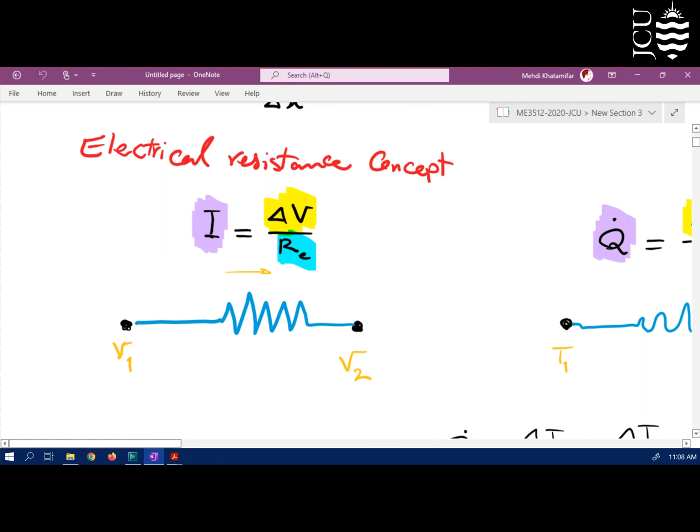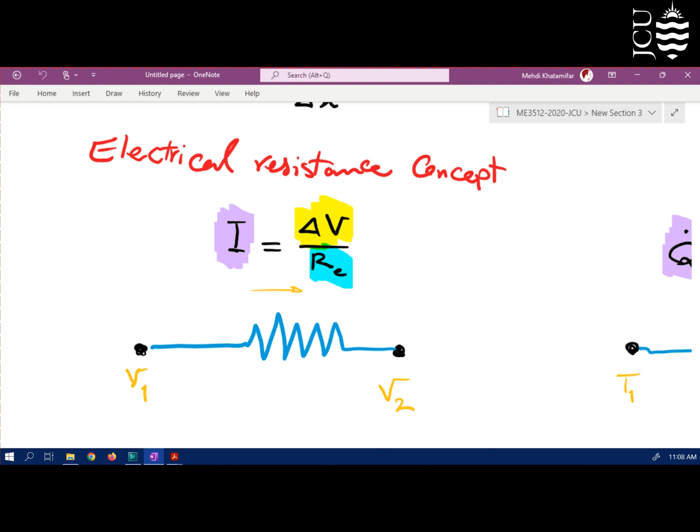Class, this is week 3 summary, and if you remember, we started this session by investigating thermal resistance. What was thermal resistance about? We basically said we are going to use the electrical resistance concept, which says difference in voltage is going to create current.

So we generate a similar arrangement for temperature. The motivating or driving force is temperature difference, and the flow or current we have is heat transfer rate, and whatever is left is going to be our resistance, but it's going to be thermal resistance.

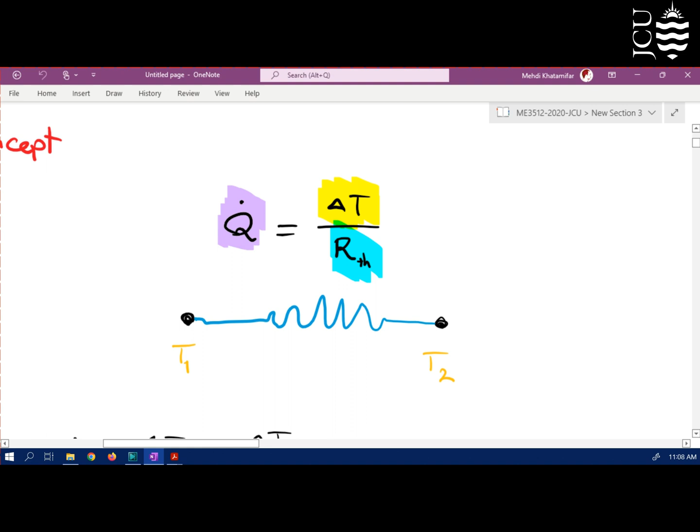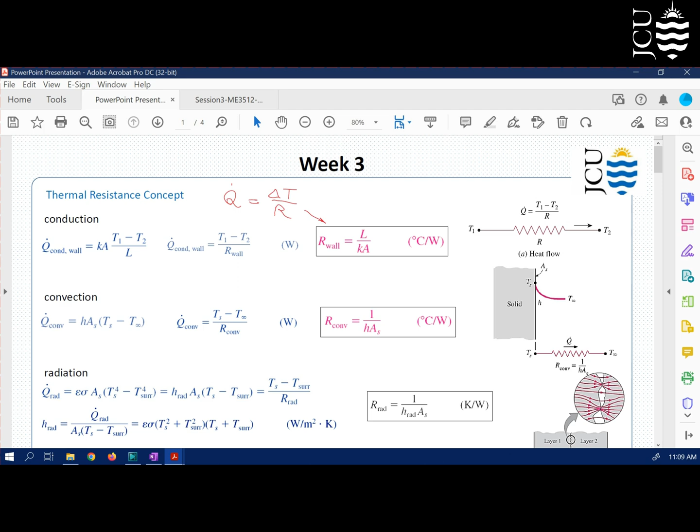So for a flat wall, we introduce thermal resistance when we write Q dot equal delta T divided by R. For the flat wall, it is thickness L divided by kA, and the unit is degree divided by watt. For convective heat transfer, it is 1 over hA, the area being the surface area in contact with the fluid, and you can continue this resistance calculation for radiation.

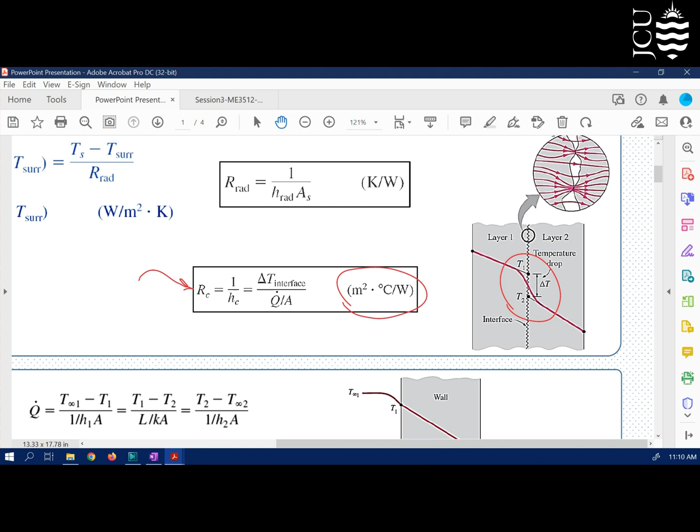Then we introduced another important concept: contact resistance. This is basically the quality of the contact between two surfaces, and if it's not perfect, we are going to have some type of temperature drop there. We calculate a resistance because of the contact between two surfaces, and as you can see, the unit is a bit different — it is multiplied by the surface area, because the surface area is also a very important factor for the contact thermal resistance. This is another resistance for us.

Then we investigated different cases we can have for resistances. For example, here we have convective resistance, conduction resistance, convective resistance, and they are in series. So when you draw their thermal resistance network, you draw them in series, and when they are in series, you just add those resistances to each other.

Remember, it's very important: when you write the formula for heat transfer rate Q dot between TA and TB, the resistance is going to be between TA and TB. This is a very important point.

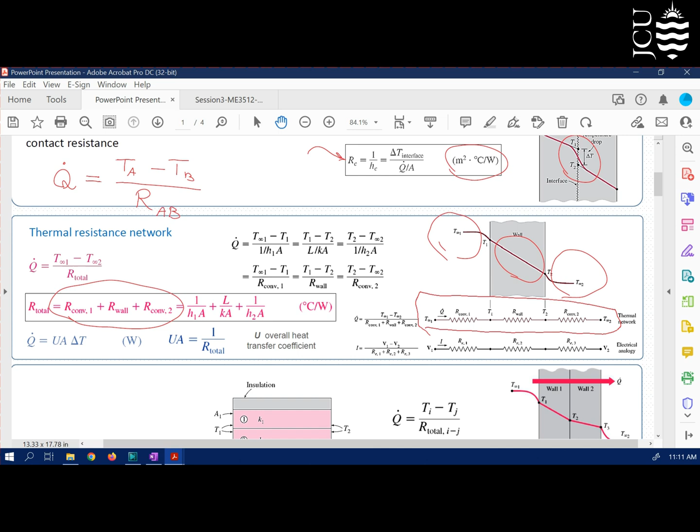How about another case when they are parallel? If they are parallel, you add the resistances as a parallel condition. So the total resistance is going to be 1 over the first one, 1 over the second one, and so on.

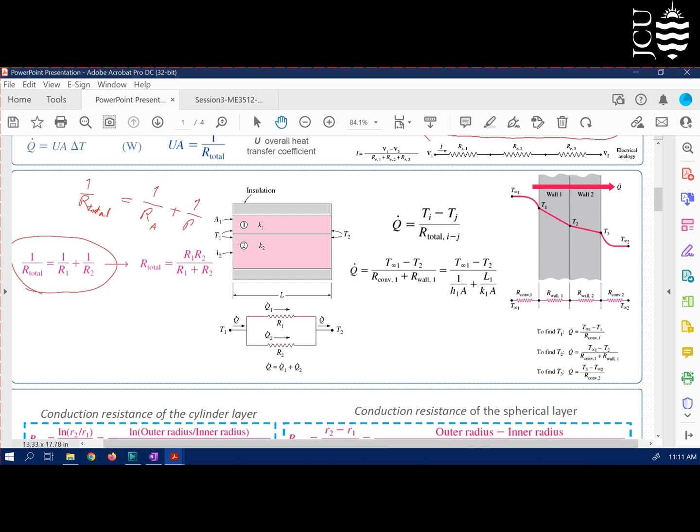How about cylindrical shape? When it's cylindrical, the resistance is going to be this formula. Remember, in the previous session we extracted the temperature profile formula for a cylinder, and we had that ln term. So when you convert that formula to this form, R is going to be ln(R2 over R1) divided by 2 pi L k.

How about a sphere? For the sphere there is another formula. So be careful when you have a question — if they are cylindrical shape or sphere shape, you need to use the specific thermal resistance formula for those cases.

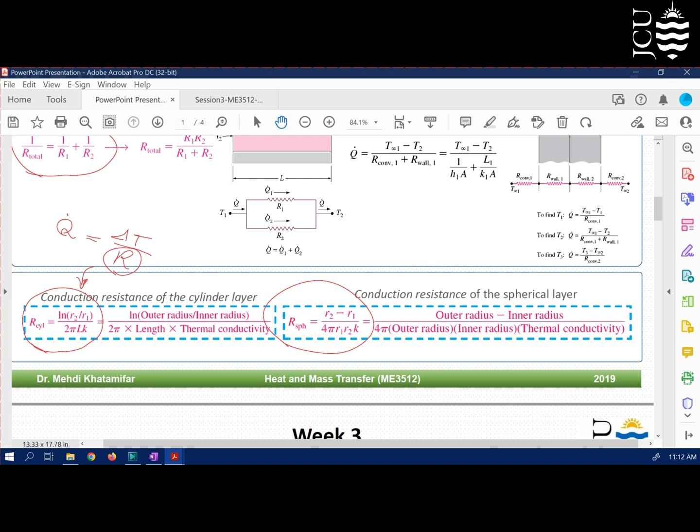Then we investigated extended surfaces, or fins. If you remember, the first assumption we had was steady state. The second assumption was 1D heat transfer, and we considered heat transfer in the X direction only, not in the Y direction — Y being this direction, not vertically.

This applies when we have a very conductive material and the thickness of the fin is very small. So we write the temperature balance, or heat transfer balance, and reach this formula. To simplify it, we introduced theta, which was T minus T infinity, and M. This converts the formula to an easier form, and we solved it — since it's a second order differential equation, you need two boundary conditions.

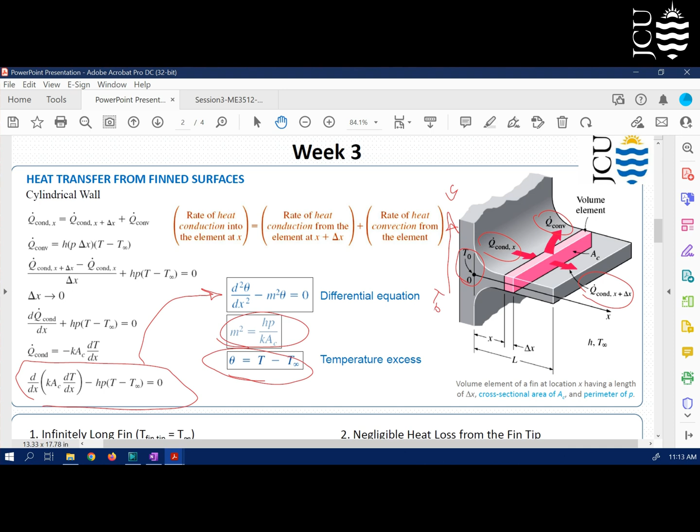One boundary condition is the temperature at the base, sometimes written as TB, temperature at the base — this is given. We need another one. For the second boundary condition, we can have 4 different assumptions.

First, let's assume the temperature of the fin tip is T infinity. To have T infinity, or the medium temperature, at the tip, it means we need a very long fin. If you use this boundary condition, the formula you get for the temperature profile is this one, and the heat transfer rate is this one.

If you assume an adiabatic fin tip, the formula is going to be this one, and Q dot is this. The third case is when we know the fin tip temperature — a little bit more complicated formulas for the temperature profile and heat transfer rate. And the most complicated case is when we consider a convective heat transfer boundary at the fin tip — this gives the most complicated formula.

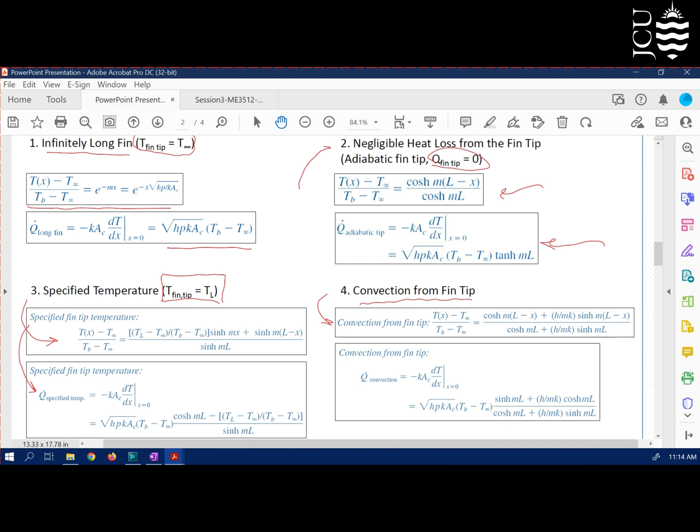As you can see, configuration number 4 is a little bit difficult to use, so we prefer to use number 2, which is adiabatic fin tip. But to reduce inaccuracy, we introduced this concept, which is corrected lengths.

Basically, we say we have some type of convection at the fin tip. So to compensate for that fin tip convection, we add this amount to the length of the fin, giving conduction here considered insulated at the tip. So this conduction, because of the extra fin length, is going to compensate for that convection at the fin tip.

If it's rectangular, you basically add half of the thickness. If it's cylindrical, you add D divided by 4, or you just use this formula, which is easier: cross-section area divided by perimeter.

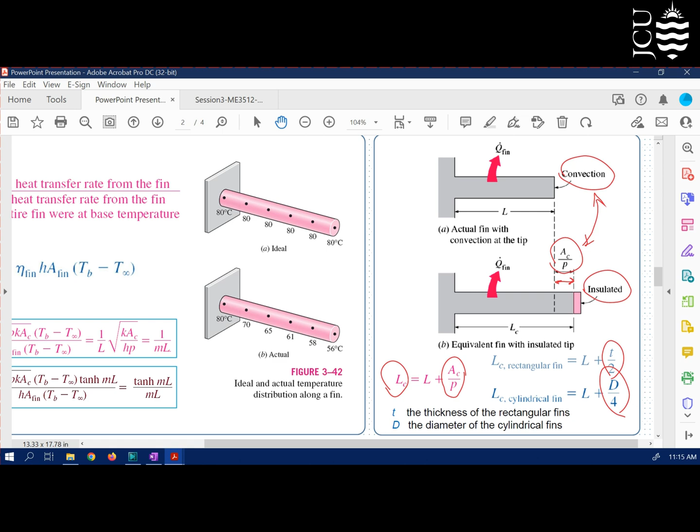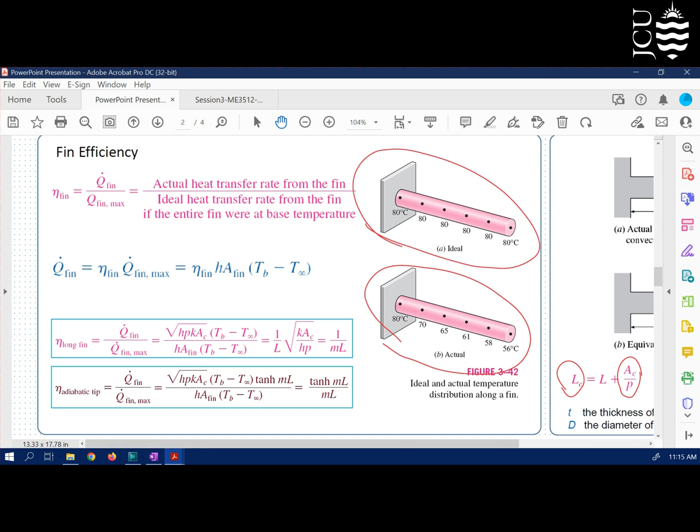Then I introduced fin efficiency. Basically, it's a ratio of the actual fin heat transfer rate to the perfect or ideal heat transfer rate in our fin. The ideal fin is one where the temperature everywhere on the fin is exactly the same as the fin base, so we can extract the formula for that.

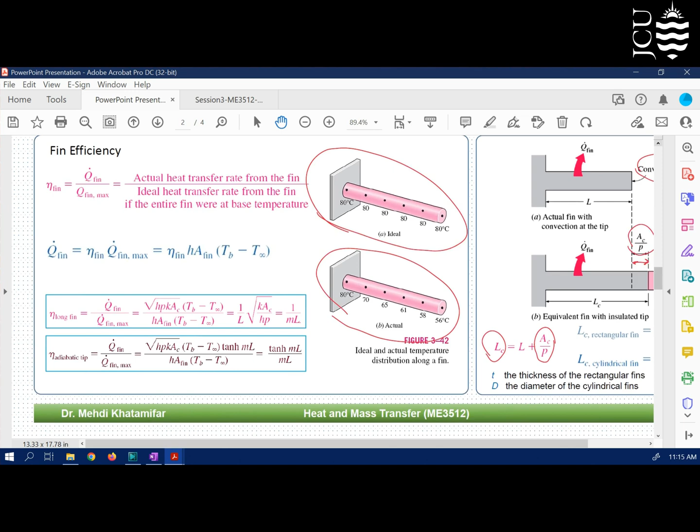Let's go with the next one. The next one we introduced was fin effectiveness, basically the ratio of heat transfer rate when we have a fin versus when we don't have a fin.

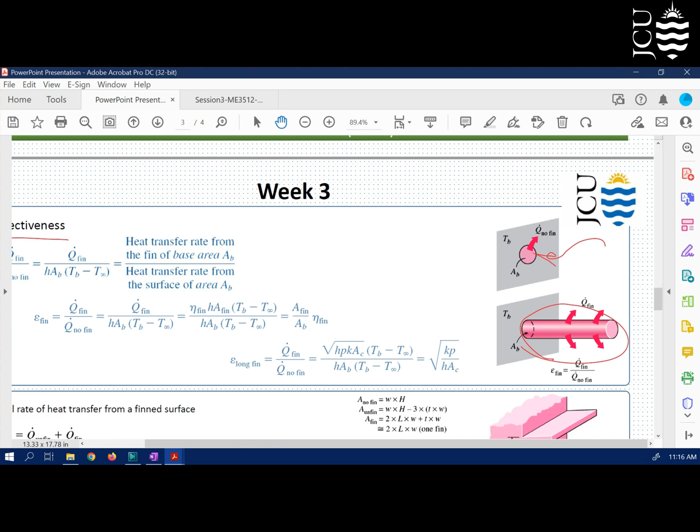Then we talked about what happens if we had a fin array, several fins, which usually is the condition we have. So you need to add the unfinned area heat transfer rate and the finned area heat transfer rate. This is very important when calculating heat transfer rate for fins.

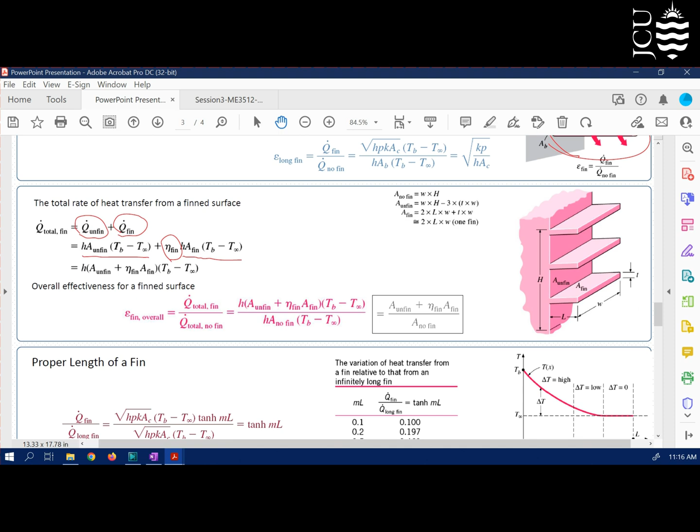You need to consider the fin efficiency, which we already defined. For the unfinned area, the efficiency is 100% because the temperature is exactly the base temperature.

Then we investigated what happens if you increase the fin length. So we divided the actual heat transfer rate for the fin by the heat transfer rate when we have a very long fin. If you divide those, we get tangent hyperbolic of ML.

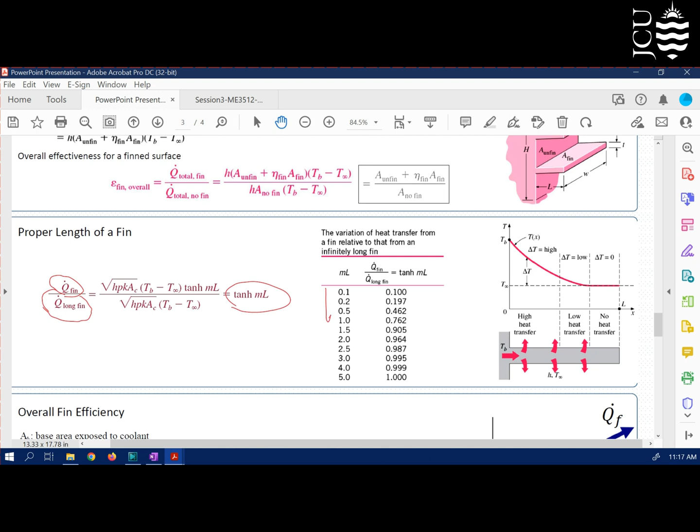By increasing ML, which means increasing the length of the heat sink fin, we are going to have a larger tangent hyperbolic value, or ratio. So we want to increase this ratio, and by increasing ML, this is going to increase.

But you should know the rate of increase is going to decrease as you go further. So if you consider ML equals 5, it's going to be 100%. We know we're never going to select 5, because we don't want a really, really long fin, since the efficiency of the material used will be very low.

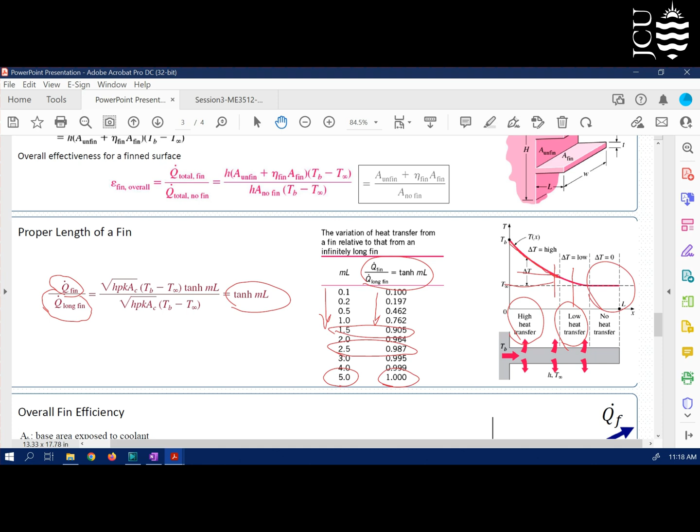So you may need to make a decision: do you want to stop at 98%? Do you want to stop at 90%? It's your engineering decision. At the beginning, when you increase length, you can see we have a high change of heat transfer rate — we call it high heat transfer area. Do you want to stop here, or go to a low heat transfer area? Stop here for your fin length, or don't go this way at all — no heat transfer area, it's just a waste of material.

Another point we investigated was when we have several fins in our heat sink. We can do the calculation and convert the formula to a form where we introduce the overall efficiency of a heat sink, which includes the efficiency of one fin. Because we converted everything to the familiar form with H, total surface area, and delta T, whatever is left should be efficiency — we called it the overall efficiency of the heat sink.

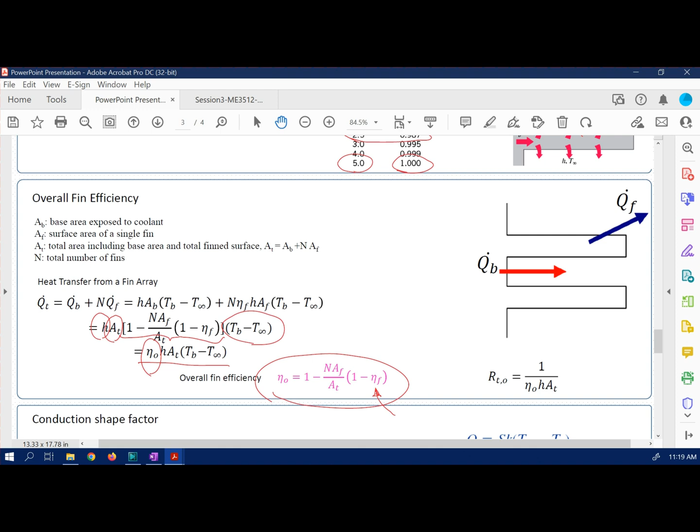This is another point, about conduction shape factor. Basically, for complicated geometries that are frequently used, some scientists extracted the formula for those cases and introduced it in this form. As you can see, we have temperature difference, thermal conductivity, times a constant number. That constant number depends on the area, geometry, and what is happening with that geometry.

We have some tables to show us what this S is. For different geometries, people extracted this S, and we call it the conduction shape factor.

For example, one case is if we had a pipe under soil — what is the heat transfer from the pipe to the surroundings? You want to calculate that heat transfer, but it's a complex geometry, so we don't have a specific calculation for that. That's why we have a table to show what the S is, this constant in the formula, for this geometry.

You put it here, you know the conductivity, you know the temperature difference, and you can calculate. So this is like a specific case for specific geometries which have many applications, and some researchers extracted this conduction shape factor for them.